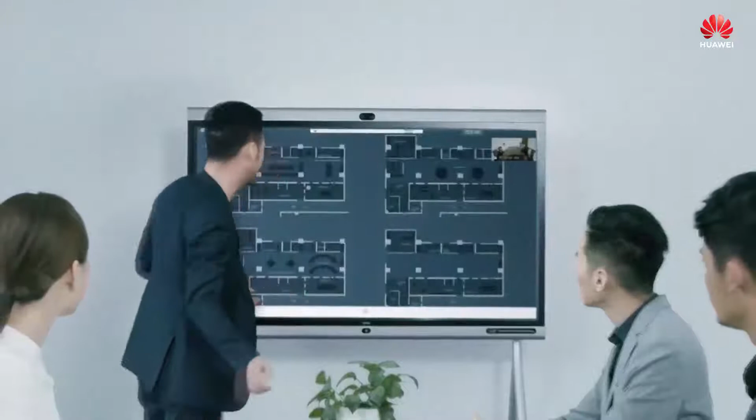Flexible wireless projection is also available in both local and remote sharing. We can share desktops and documentation in any convenient way. With native whiteboard interaction, we can share our ideas and inspirations immediately to stimulate our team's creativity.

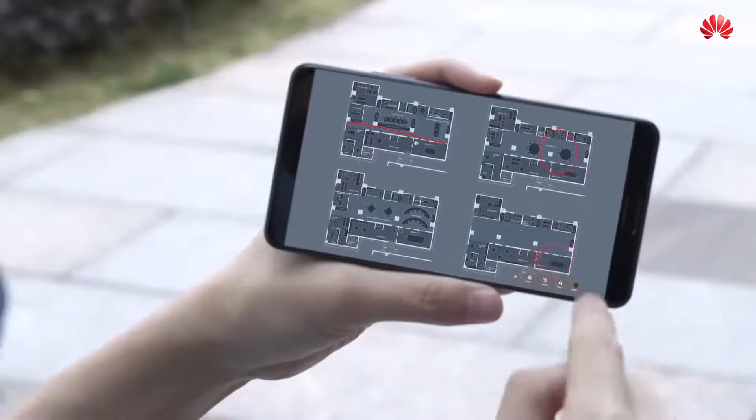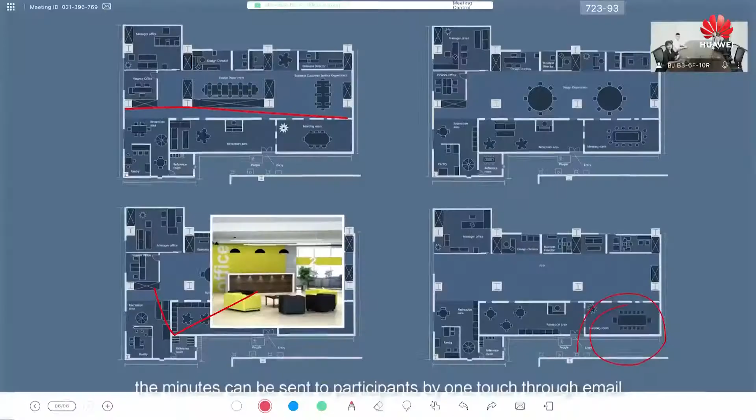After the meeting, the minutes can be sent to participants by one touch through email, so that we can easily summarize the key points and reopen it on other meeting devices. The external web meeting also becomes easier. Just touching one link, we can immediately join an existing meeting. It can be used for cross-enterprise collaboration, such as remote recruitment and vendor communication.

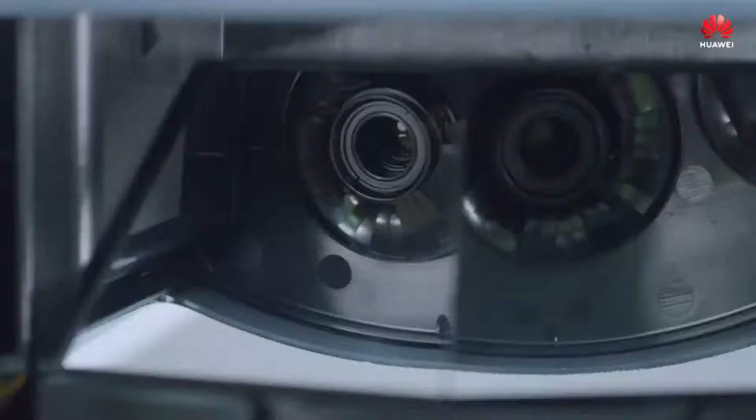The unique panoramic cameras, sound localization technology, and 4mm narrow gap displays provide an unparalleled immersive communication experience. Powerful 4K UHD dual stream output can easily cope with the enterprise's large administrative meetings, live training, and various industry applications. More and more enterprises and organizations are selecting Huawei as their partner for digital transformation. Huawei CloudLink makes easier communication, quicker collaboration, and higher security.

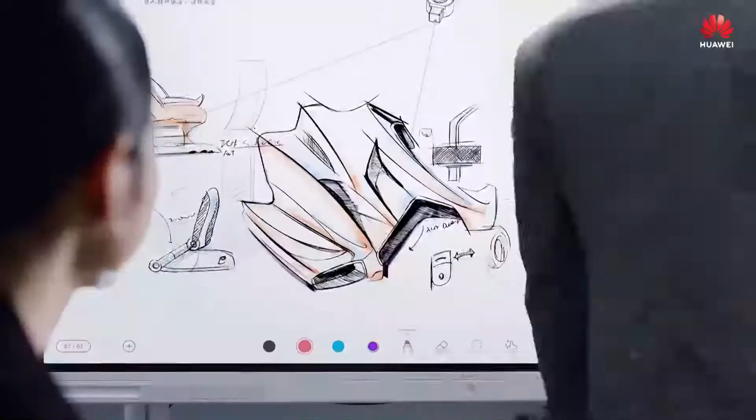Now let's look at a variety of Huawei cloud applications. Based on the open Huawei cloud ecosystem, Huawei Idea Hub offers rich applications and services. It has built-in common office applications such as the information window and welcome board upon delivery.

Besides, Huawei App Gallery has a dedicated area for Idea Hub. More than 170 applications have been adapted and released for large screen, and users can directly download and use them. For large enterprises, we can push their external applications to each Huawei collaboration board through the management platform for unified distribution and management of external applications.

The information window function is developed based on Huawei's best practices. Images and videos can be pushed to the collaboration board through the cloud service platform for real-time information release, corporate culture promotion, and product marketing activities. For customer receptions and team building activities, we have designed the welcome board function, which can flexibly and efficiently customize the theme of activities.

Here are another two examples of using collaboration boards. When we don't bring computers with us when communicating with customers, we can open documents stored in USB flash drives or cloud drives on the Idea Hub to communicate with customers. And during internal training, we often need to record the training content. In that case, we only need to download the screen recording app from the Idea Hub application market to record the screen and audio sound.